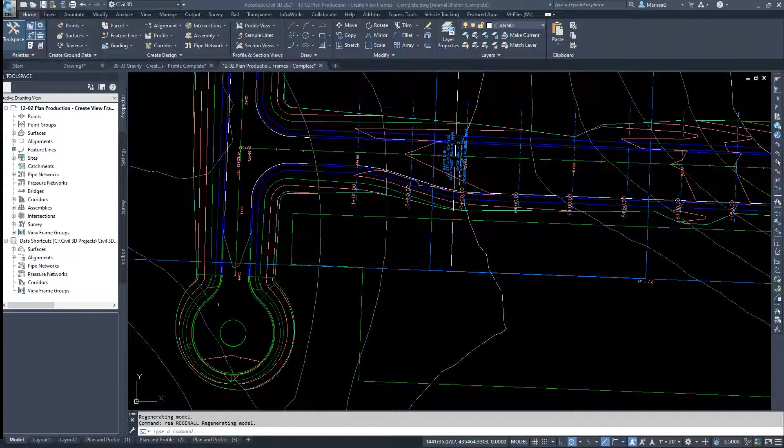Thank you, TJ. For those of you watching who may not be aware of this functionality, this is in Map 3D as well as Civil 3D. Those of you with AutoCAD, the AutoCAD toolkit will also have this because you have Map 3D. When you switch to a layout tab, we have the ability in layout tools to place a dynamic scale bar that will link to a viewport.

So the question is, when you choose a dynamic scale bar, and these are out of the box, the method when placing this, once I select a viewport, forces you to put in what you want the scale bar division to be. I want a scale bar that's going to show me 1 inch equals 40 feet. But this is showing me meters by default, and really the question deals around the scale ratio you see down there at the bottom. Can you come in here and add your own scale ratios so they actually say 1 inch equals 30, 1 inch equals 40?

The answer to this is unfortunately no. This is hard coded into the program for you to use a scale ratio, because they want to make sure it really is using the units set in your drawing versus the units that are going to be here on the piece of paper. So it's important to know there is going to be that multiply by 12 thing, which is why if I want 1 inch equals 40, my ratio needs to be 1 to 480.

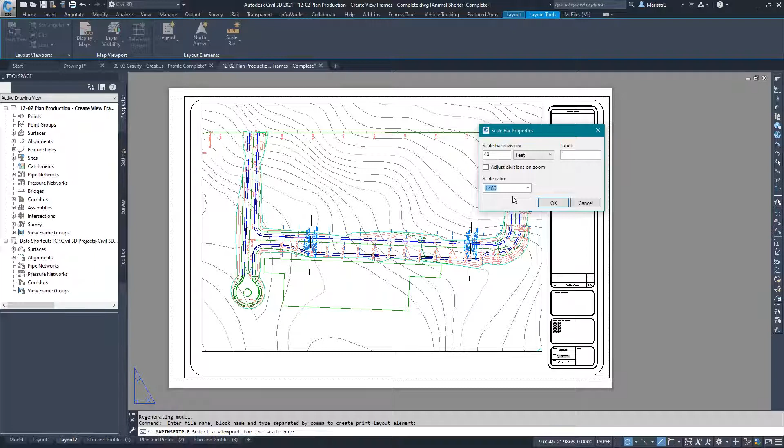Now I'm in feet. For those of you working with AutoCAD using architectural units where your units are inches, your ratio is going to be a little different. But here, there's no way to really change that to be that equals-equals sort of equality scale that a lot of us engineers are used to seeing. You need to enter the scale ratio here, but when you place it in the drawing, it's still going to place it. You're not going to see 480 as that division. You're going to see 40 or 20 or 30 or whatever you set in that particular dialog box.

So I wish I had a better answer of yes, you can do it and here's how, but unfortunately the answer is you can't. But as long as you're making sure you're using the right ratio, it's still going to work the way that you want it to work.

Great, thank you, Marissa. So this next question, I'm going to turn over to you, Chris. I'm going to make you the presenter really quick. This question is from Derek. How do you change the root file folder structure in BIM 360 after it has been created?

Chris, are you there? Yes, I am. One second, I do apologize. Is everyone able to see my screen?

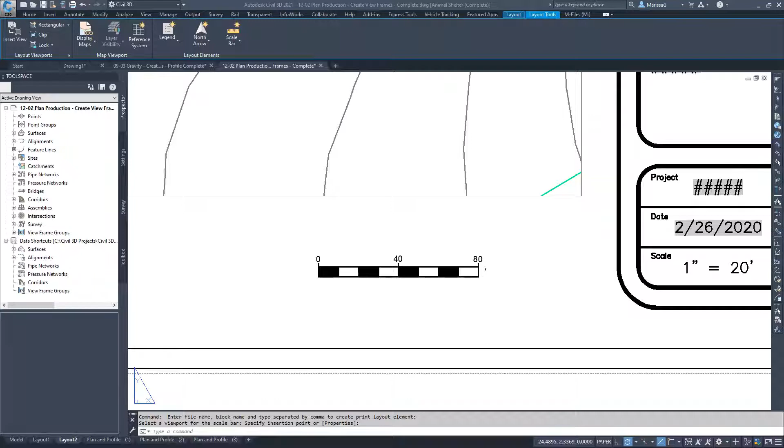I think they might still be seeing mine right now. Oh, there we go. All right, just got the notification.

Great question. So when you're trying to update these root folders, whenever we create a new BIM 360 project, you're essentially left with two folder structures to start: Plans and Project Files. You can actually rename these—it's pretty simple. Just come over here, click the three little dots, and you can add subfolders or rename them.

So then I could say that these are our Revit models. If I could spell models correctly—there you go.

Now, the thing to note here is when you're changing these folder structures and names around, it's going to take a little bit for Desktop Connector to keep up, just because Desktop Connector is trying to synchronize with what BIM 360 is. For those who aren't aware, Desktop Connector connects your computer and treats BIM 360 as a drive on your own computer. So for BIM managers using BIM 360 services who don't have Desktop Connector yet, I totally recommend doing it. But a lot of times when we're trying to change our folder structure, the idea is changing it inside BIM 360 and then having Desktop Connector keep up with it.

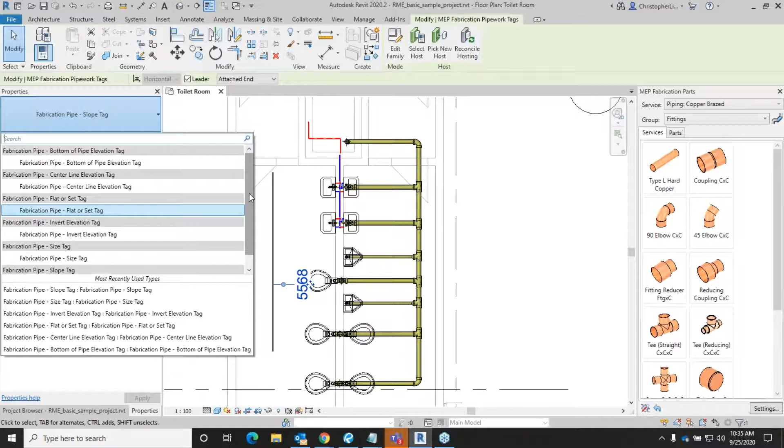And these tags can be things like for elevation, for size, for slope, things like that. Right now I have this, even though it says a slope tag, right now it's doing item number. So that's something to keep in mind. So if you are trying to tag multiple parameters, you need multiple tags.

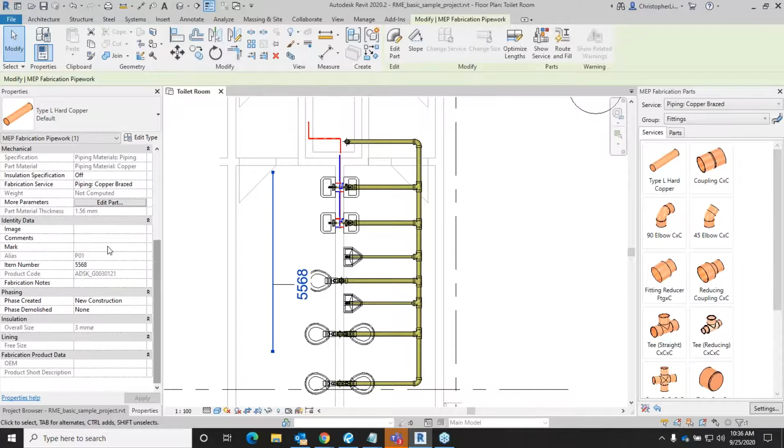And you also need to understand that when you're talking about instance-based parameters, this is going to be for the parameter set for the actual pipe itself. You can also have type parameters here that actually are applied to the actual type of that particular family. So if I have 1,000 or 10,000 pipes of this type, if I change something here like manufacturer, if I type in that CADD Microsystems is a manufacturer here, it will update for every single pipe of that type. So that's just something to keep in mind.

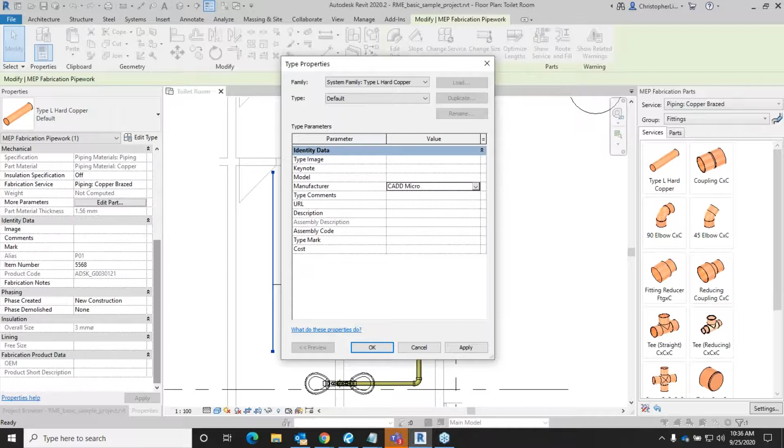So the question's from Jonathan again. We recently started a Civil 3D project on BIM 360 to share with the sub-consultant. Can you effectively edit a sheet set manager DST file, which is the definition file, on BIM 360? So this is in reference to Sheet Set Manager.

I will say that really BIM 360, when it was introduced, even with the collaboration for civil, didn't really support the Sheet Set Managers. However, there is a new updated version of the desktop connector, released on August 11th. If you download that version, you will have more functionality. I won't say it's perfect, but you will have the functionality to open it, and when you load it up to BIM 360, to the project, it's going to load all of the files that it references. So that's a new, really helpful thing.

But there are still some things to keep in mind when you've got the sheet set open and somebody else also has it open. There's some issues with locking and not necessarily updating. When you open a file from the sheet set, it's automatically locked for edit, which is better than before - it didn't do that, and that's part of why it wasn't really supported. But the DST file itself does not lock, which means two of you can essentially be doing work on this at the same time.

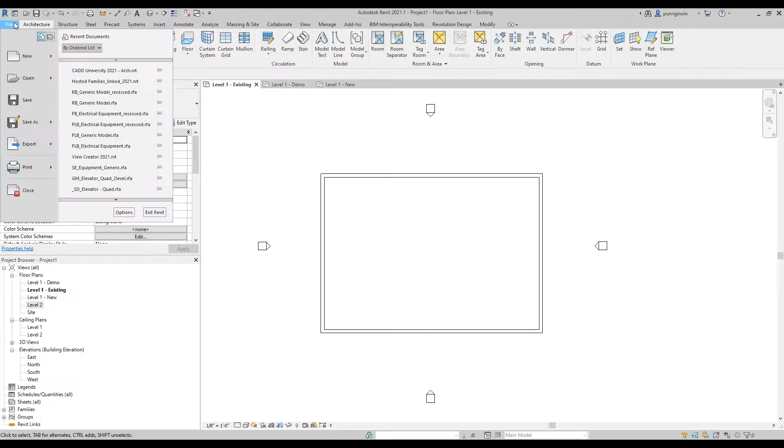So when you go to File and Export and export it to Navis, you're going to have these settings down here. You're going to look in these settings... maybe it's not going to show, oh shoot, I think because I'm just sharing one screen it's not going to show this screen.

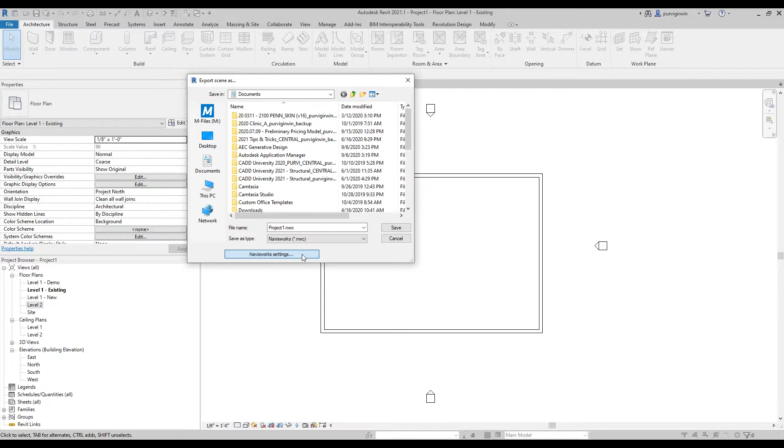Is it? Move it? No, okay, one second. I think I'm going to have to unshare and share my whole screen instead of just Revit because it's getting mad. Throw it back to me for a second, or let me do this, let me share it. I think you might have to give it back to me again. You're still presenting, oh, you still have control. Okay, let's see, oh uh-oh, now it's spinning. You broke it. I broke it. Here, I'll take it back and send it over. Okay, let's try that. I don't know what I broke. I think I broke Revit.

Well, I can talk through it since it's not working now. When you export to Navis, in the Navisworks setting there's actually a setting for the coordinates, and it either says internal or shared. So the recommendation was to export both ways, then as you link them into Revit, see which ones line up where you want them to be, and see if that makes a difference.

The other thing I typically recommend is to make sure there's something in the model you can manually line up, so you can put them together and manually move them around once you're putting them into Navis. Make sure you have some grid intersection or a corner of a building to use in case the actual shared coordinates inside the models are not aligned with each other.